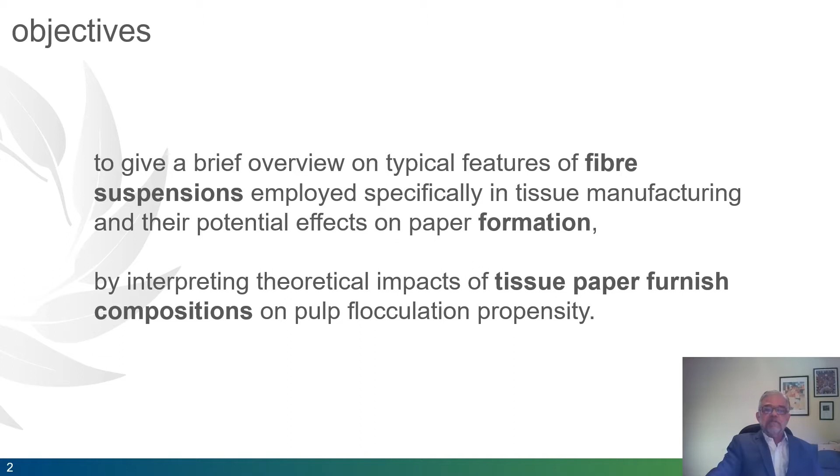Formation is affected by many factors, but fiber suspension mechanical flocculation is critically harmful. So, to study the impact of fiber suspension characteristics on formation, this work had the objectives shown in this slide, that is, to give a brief overview on typical features of fiber suspensions employed specifically in tissue manufacturing and their potential effects on paper formation. This was done by interpreting theoretical impacts of tissue paper furnish compositions on pulp flocculation propensity.

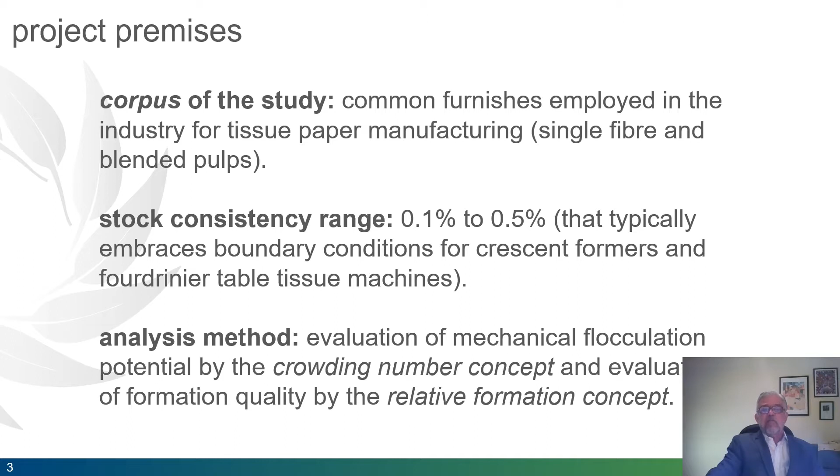This slide shows the premises defined for the work. The corpus of the study was the common furnishes employed in the industry for tissue paper manufacturing. The stock consistency range was defined to be from 0.1% to 0.5%, because it typically embraces boundary conditions for crescent formers and Fourdrinier table tissue machines. The analysis method was defined to be evaluation of mechanical flocculation potential by the crowding number concept and evaluation of formation quality by the relative formation concept.

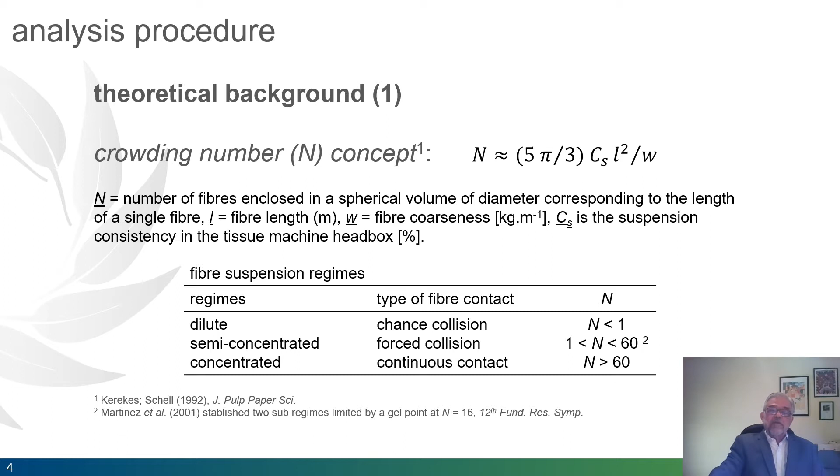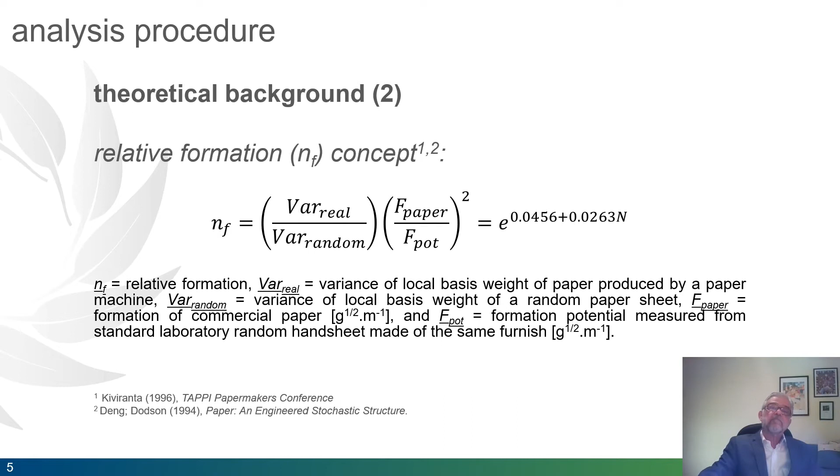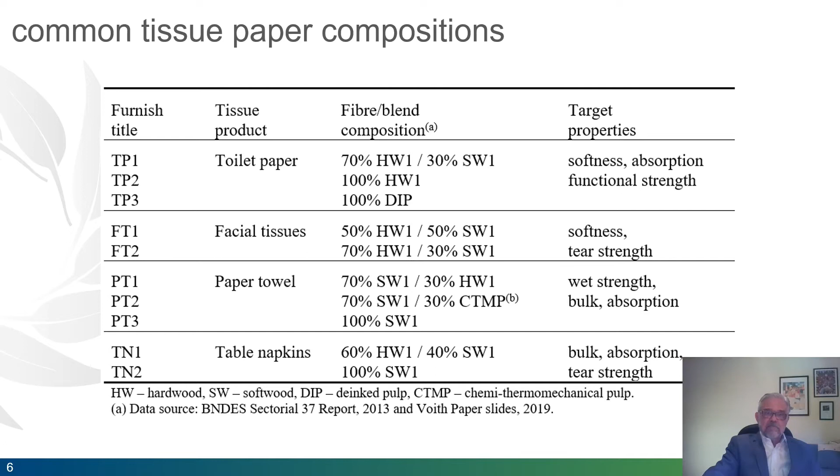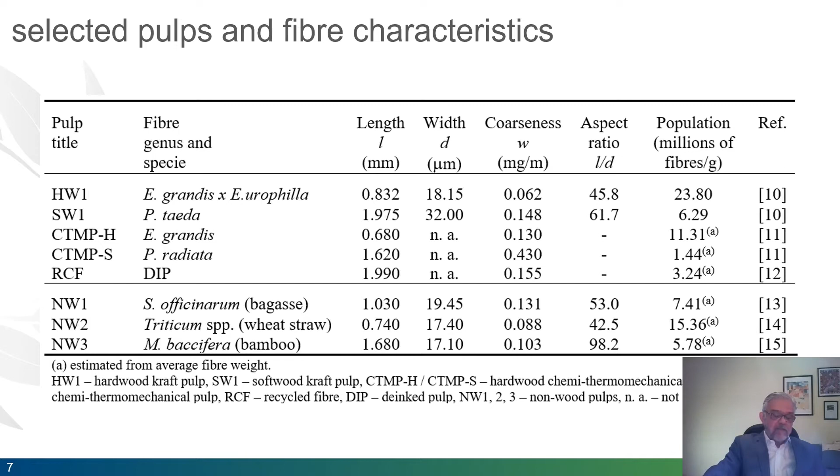Here we can see different hardwood and softwood fiber characteristics, mainly from eucalyptus and pinus species. The table also shows features of recycled fiber represented by the deinked pulp and non-wood raw materials like bagasse, wheat straw, and bamboo. The fiber morphological properties of all pulps in the table were used to characterize the different tissue furnishes in terms of crowding number and relative formation indexes.

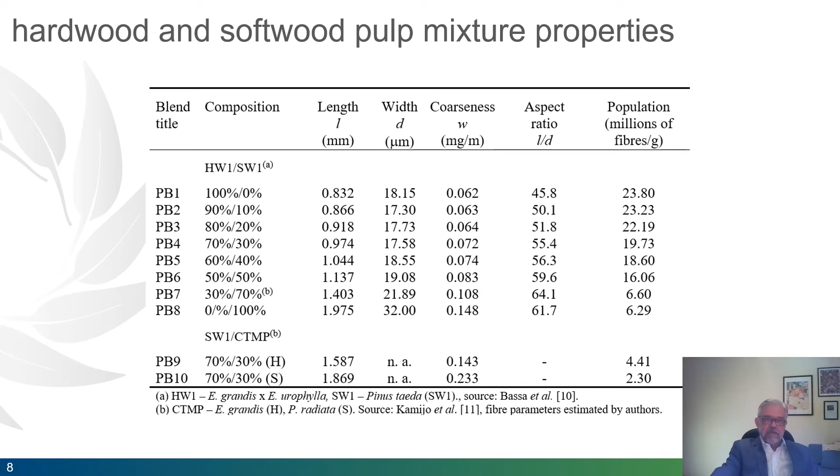This slide shows fiber properties of blended hardwood and softwood pulps used in the present study. In the table, we can see how fiber length and coarseness vary as a function of the increase of the mass fraction of softwood in the mix with hardwood. Now let's see the results of crowding number and relative formation evaluations of traditional tissue paper furnish compositions. Let's start with the flocculation propensity of wood pulps.

In particular cases, crowding number values above 60 that fit the concentrated fiber suspension regime were found. For instance, for the pulp with 100% pinus softwood at high consistency, meaning that fibers are in continuous contact and flocculation is expected.

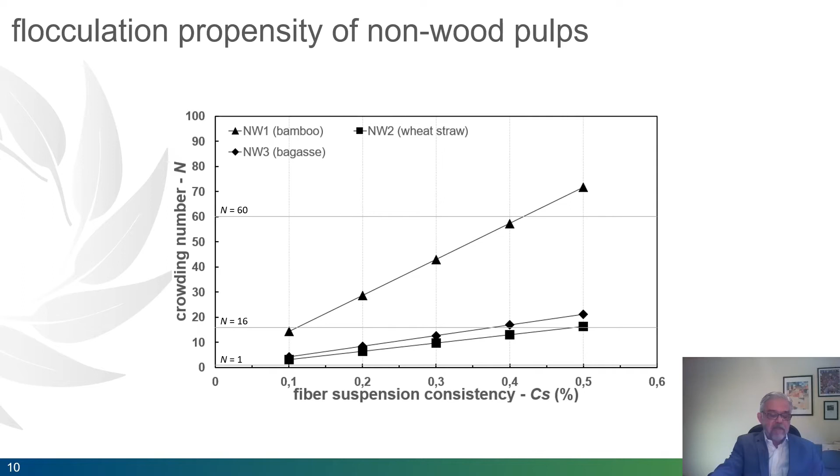Now we see the flocculation propensity for non-wood pulps, which shows a performance equivalence between the bamboo pulp and the softwood pulp. The results for pulp made from wheat straw and bagasse are closer to hardwood pulps, meaning that these non-wood pulps are less sensitive to flocculation. This can be explained by similarity between trends in fiber length and length to coarseness ratio.

Here we have the results of flocculation propensity of toilet and facial tissue furnishes. The adverse effect of softwood content on the flocculation tendency is clear. Toilet paper based on 100% hardwood has a crowding number about 15% lower than the blended furnish made of 70% hardwood and 30% softwood. The same effect is observed for facial tissues when the softwood mass fraction in the furnish is increased from 30% to 50%.

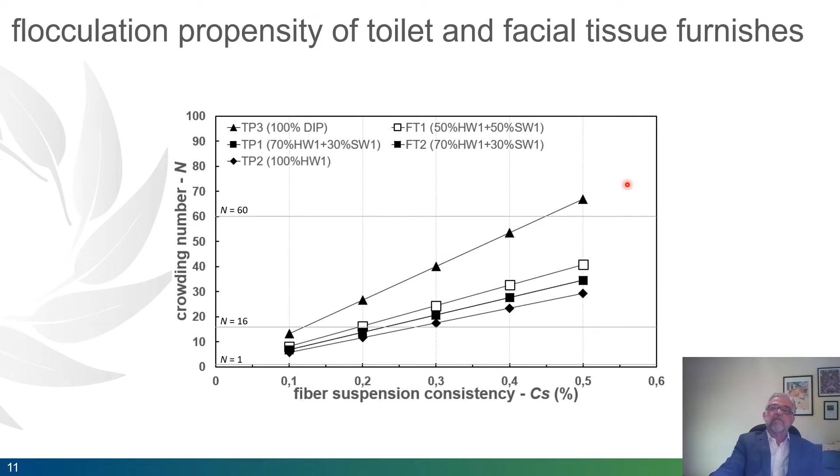A quite high flocculation propensity was found for the furnish based on 100% deinked pulp. The selected deinked pulp contains very long fibers compared to other pulps in the same figure. If we look at the results for paper towel and napkins, we'll see similar results, but now I can emphasize the effect of pulps based 100% on long fibers, that is, on softwood. The higher flocculation potential belongs, as expected, to the towel and napkin furnishes made of 100% softwood, and both have similar behavior to the deinked pulp.

Furnish compositions employing CTMP have lower flocculation tendencies even when mixed with softwood, since CTMP tends to have shorter fibers and higher fiber coarseness. These results emphasize the impact of fiber morphology and stock consistency on flocculation potential of tissue paper furnish, which directly influences web formation uniformity, as will be discussed in the next slide.

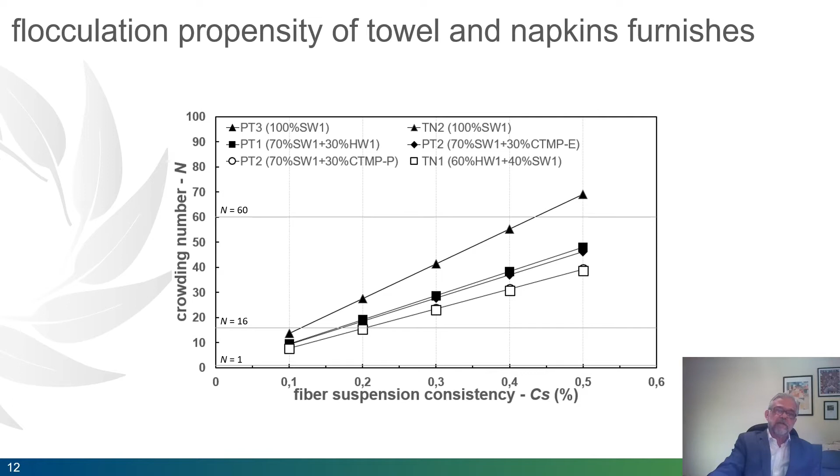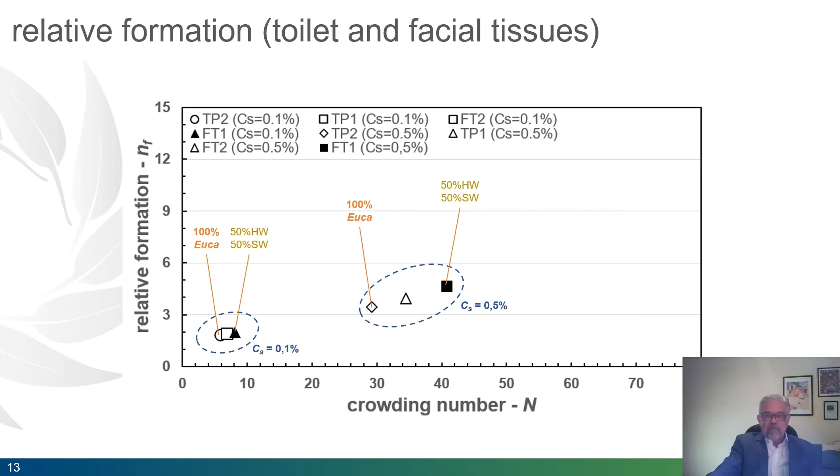The next two slides display the results of relative formation computed for traditional tissue paper compositions, also for the range of stock consistency from 0.1% to 0.5%. As mentioned before, lower NF denotes better formation uniformity or lower grammage distribution variance. Looking at the results for toilet paper and facial tissue furnishes, we see that the lowest relative formation was found for the 100% hardwood or eucalyptus furnish, like in toilet paper. The combination of length and coarseness of eucalyptus fiber is what produces the lowest crowding number. In opposition, the highest crowding number and the highest relative formation index was found for the mixture of 50% hardwood and 50% softwood normally encountered in facial tissue production.

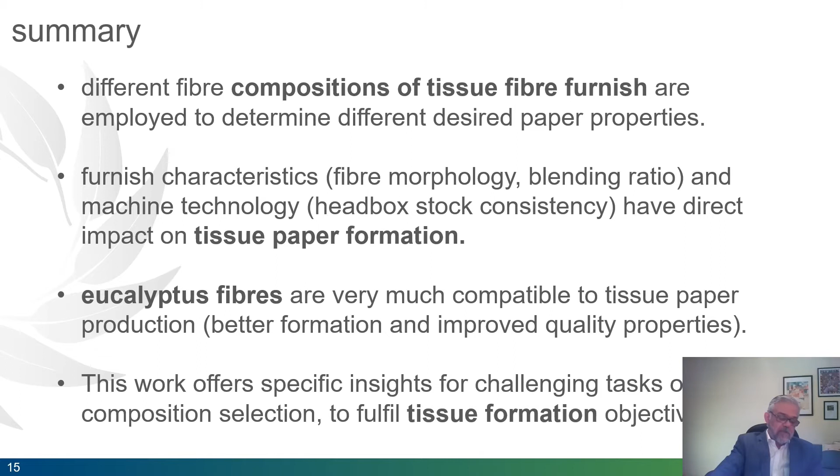In summary, we saw different furnishes employed for tissue manufacturing and how they impact paper formation. I want to highlight that eucalyptus fibers are very compatible with tissue production due to better formation and improved quality properties, and that this work offers specific insights for the challenging task of furnish composition selection to fulfill tissue formation objectives. Thanks for your attention.

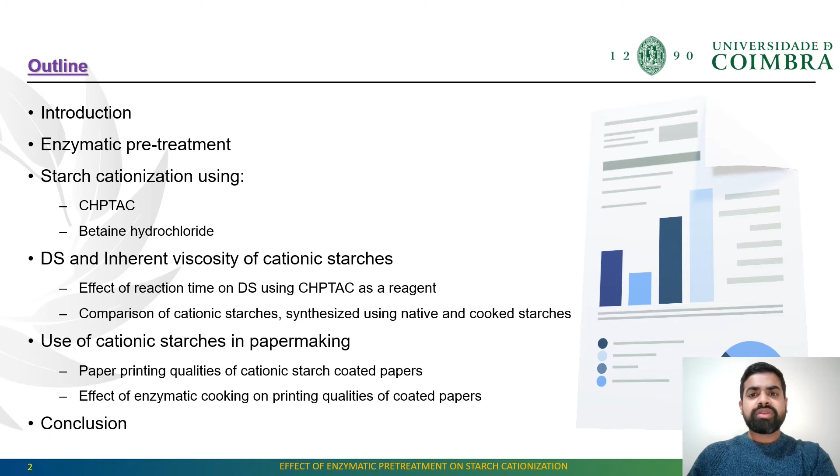Native starch is one of the most common paper additives and is used as a strengthening agent, surface sizing agent and binder in paper coating. These native starches are non-ionic, and due to this fact their applications in papermaking are limited. Chemical modification is one of the best ways to expand their use in different applications. Cationization is a widely accepted method for modification of the physicochemical properties of native starch. Cationic starch is used in the paper industry as a flocculating agent, retention aid and paper strengthening agent. However, modified starch has also been found suitable in surface treatment of paper for improving optical and printing properties.

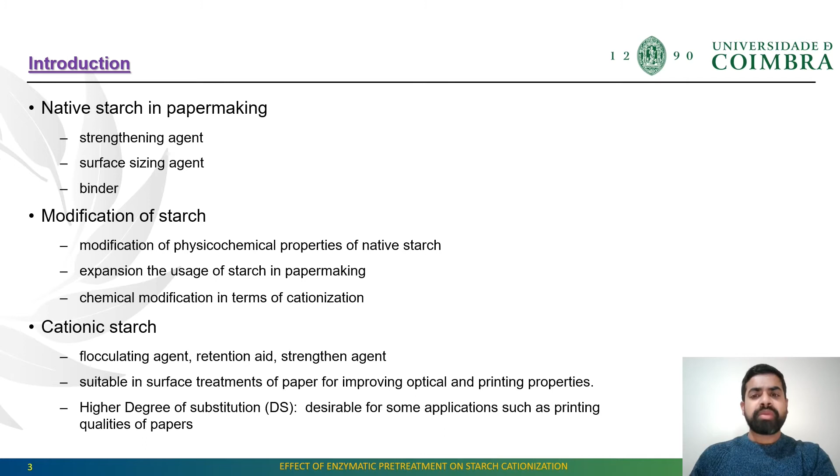Cationic starch can be synthesized by substituting the hydroxy groups of the anhydroglucose unit of starch with positively charged functional groups. The higher the charge, the higher the degree of substitution, which is also desirable in some paper applications such as paper printability. Further, in enzymatic pretreatment, corn native starch was pretreated using alpha amylase enzyme and heated for 5 minutes at 80 degrees centigrade. Then the temperature was raised to 90 degrees centigrade for 15 minutes for cooking the starch.

After cooking, the starch solution was cooled down and absolute ethanol was added to precipitate the cooked starch, which was vacuum filtered, dried and stored in the oven at 50 degrees centigrade. In the enzymatic cooking, the alpha amylase enzyme cleaves the 1,4-alpha-D-glucopyranosyl linkage of amylose and amylopectin, which reduces the degree of polymerization of starch polymer.

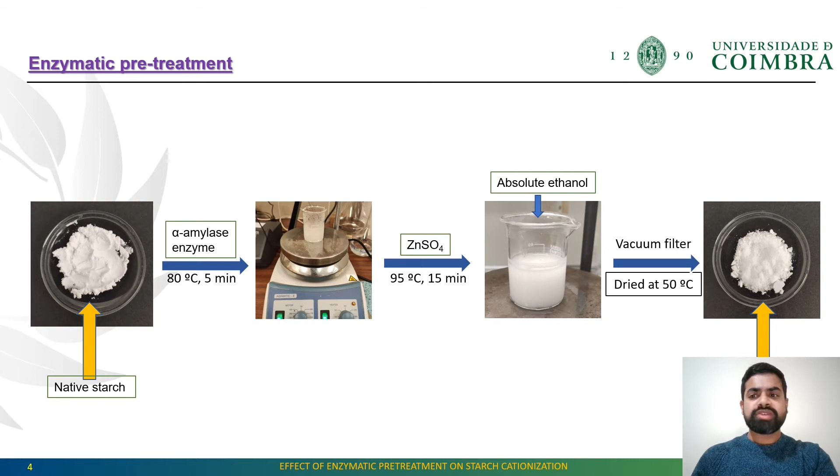Further, with the high temperature cooking, the starch granule structure becomes more open and dispersed. These cooked starches along with the native starch were used in the cationization reaction. For starch cationization, we used three different methods. This scheme shows the first method in which CHPTAC was used as a reagent. In presence of sodium hydroxide, CHPTAC converts to its epoxy form, which further reacts with the starch molecule in aqueous medium. The end product cationic starch ether contains an ether bond between the starch molecule and trimethyl ammonium group.

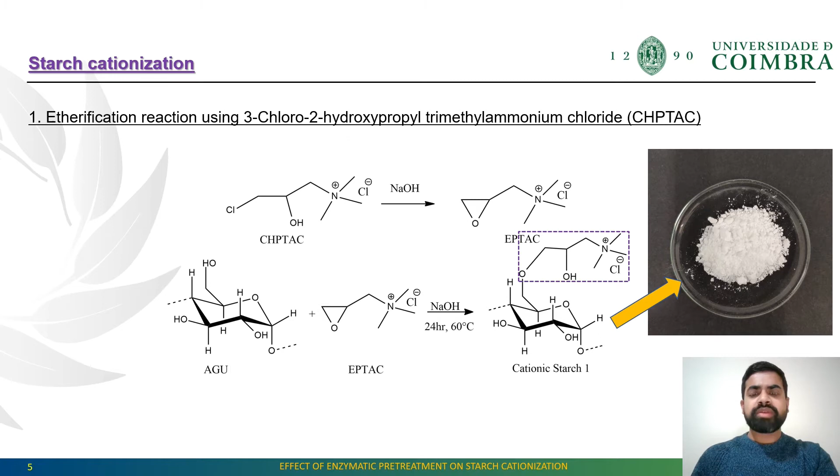We performed the reaction for 3 hours, 6 hours and finally for 24 hours for studying the effect of reaction time on degree of substitution. We obtained cationic starch ether as a white product after precipitating it using ethanol. Further talking about the second method in which betaine hydrochloride was used as a reagent, the reaction proceeded in presence of DIC and DMAP in organic solvents such as DMF and DMSO. It was observed that the final product was a bit yellowish in color and contained an ester bond between the anhydrous glucose unit

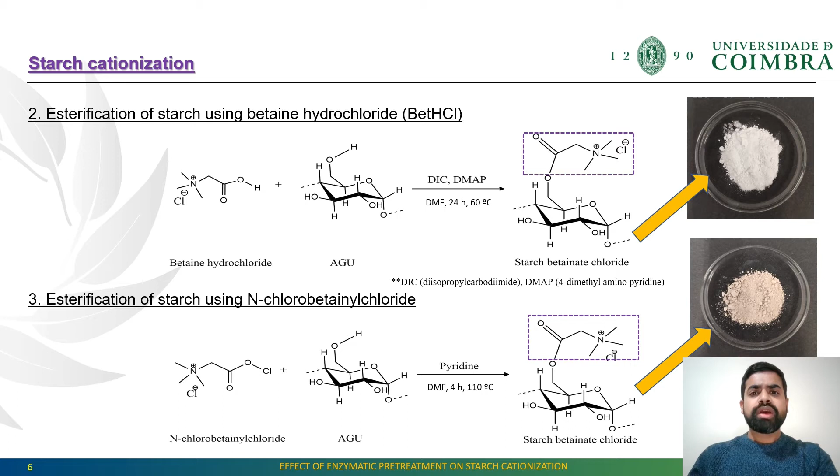and trimethyl ammonium group. The third reaction was also performed using betaine hydrochloride, but prior to the reaction with the starch, it was converted to its acyl chloride using thionyl chloride. The reaction proceeded in pyridine and the final product was brownish in color. As reported in the table, a total of 8 runs were performed covering all these three methods, where the first 6 runs are with CHPTAC reagent. Runs 7 and 8 represent the second and third method using betaine hydrochloride.

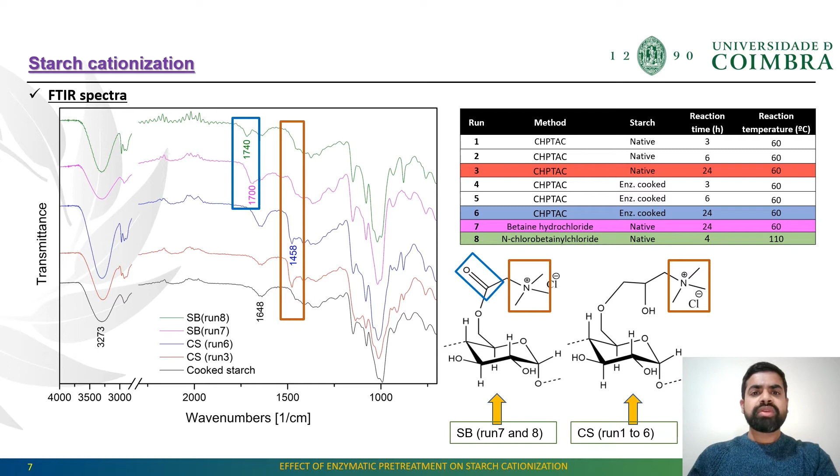FTIR was performed to analyze the functional groups of cationic starch synthesized using etherification in runs 3 and 6 and esterification in runs 7 and 8, compared with the native starch spectrum. All fundamental peaks of starch can be seen in all spectra. Compared to the native starch spectrum, a new prominent peak at 1458 cm inverse can be observed due to the quaternary ammonium group attached to the anhydrous glucose unit during the etherification and esterification reaction. Additionally, peaks at 1700 and 1740 were observed due to the presence of the ester bond in starch betainate.

In this slide, the proton NMR spectra are shown for cationic starch ether and starch betainate and compared with the native starch spectrum. In addition to calculating the DS, proton NMR spectra can also be used for investigating the detailed structure of modified starch. The peaks at 3.5 to 4 represent the hydrogens attached to the different carbons of the anhydrous glucose unit. A singlet at 3.2 ppm due to the hydrogens of the methyl groups attached to the quaternary ammonium group in cationic starch confirms the presence of the cationic group attached to the anhydrous glucose unit. The DS was also calculated using these NMR spectra for each reaction.

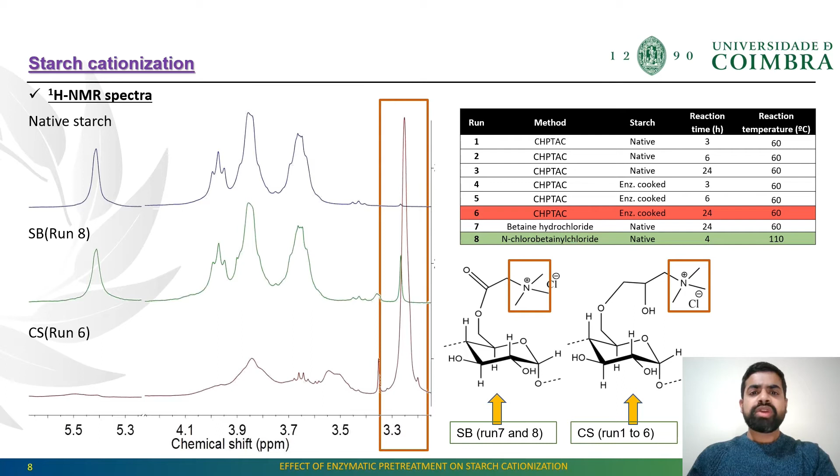Further talking about the DS of cationic starches, this figure shows the effect of enzymatic cooking and reaction time on DS of cationic starch ether. It was observed that with the increase of reaction time from 3 to 24 hours, the DS increases from 0.2 to 0.33 using native starch as a raw material and 0.34 to 0.43 when cooked starch was used in the reaction. This increase is likely due to the formation of more porous starch granules, which facilitates the access of reagent to the hydroxyl groups of starch. It was also observed that the cooking of starch enables the homogeneous dispersion of starch granules in the solvent by increasing the solubility.

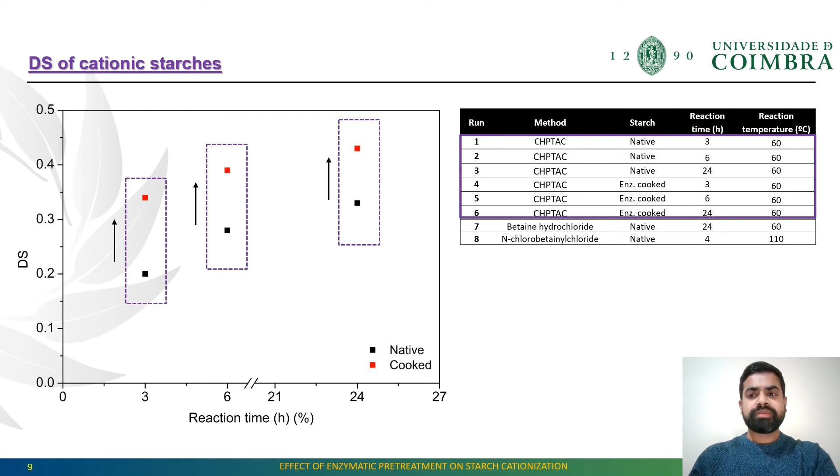Further talking about the inherent viscosity of native and cooked starches, undoubtedly the inherent viscosity decreases with the enzymatic pretreatment, as cooked starch showed lower inherent viscosity compared to native starch. This decrease can be justified by the cleavage of the 1,4-alpha-D-glucopyranosyl linkage of amylose and amylopectin, which reduces the degree of polymerization. In fact, the hydrolysis of starch granules due to the highly alkaline and high temperature environment may also be one of the reasons for decreasing the degree of polymerization.

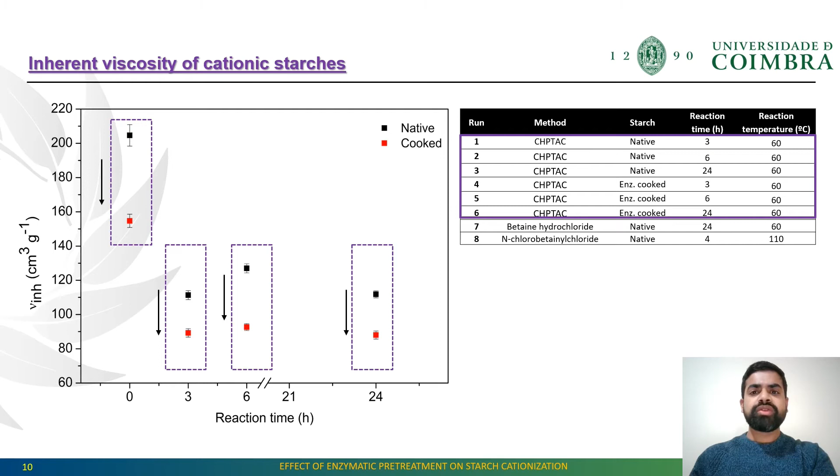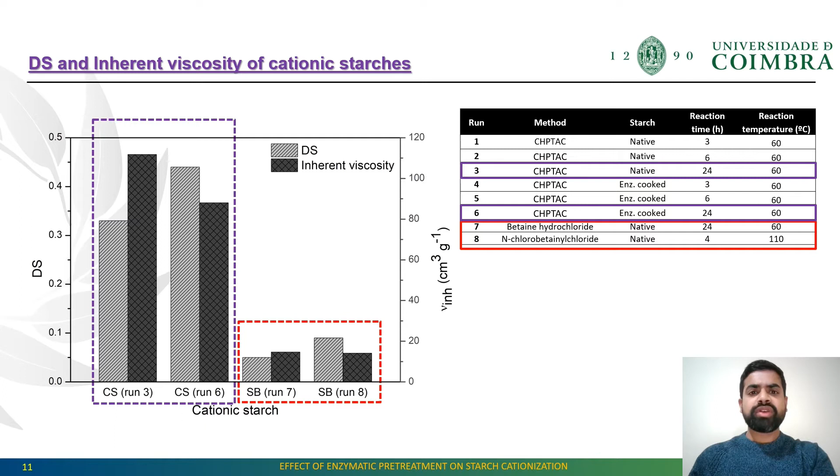The product from the esterification reaction showed a lower range of viscosity. Hence, the same reactions were not performed using cooked starch, as starch granules already face so much hydrolysis during the esterification reaction. Also, lower DS around 0.1 were obtained using run 7 and 8. Besides, a brown color product was also obtained in run 8, which could be due to the more severe degradation of starch granules at high temperature.

Moving forward to the application part, these cationic starches were used to prepare the coating formulation, along with the general coating components such as alkyl ketene dimer and optical brightening agent. The native starch was used as a host component, and calendered base paper without any surface treatment was used for coating operation. The laboratory coater was used for coating operation to achieve 1.5 to 2.5 gram per meter square dry coating weight. Finally, all coated papers were printed using an inkjet printer. Further, the printing qualities were evaluated.

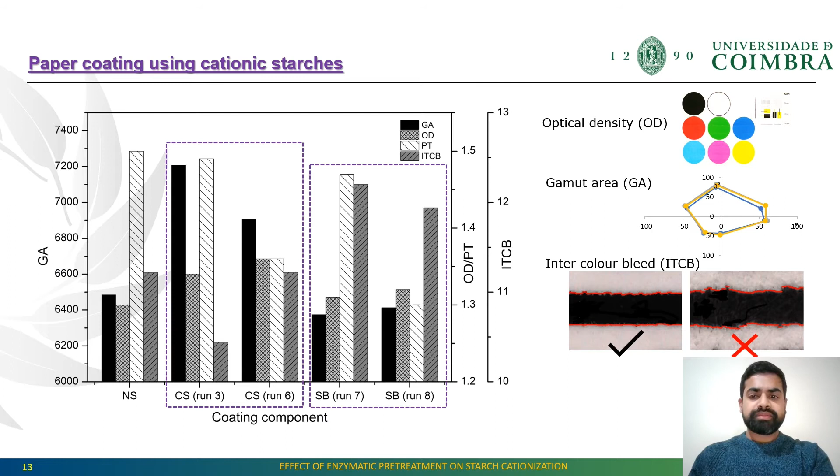Finally, it can be concluded that the pre-treatment of starch using enzymatical cooking and high temperature converts the granules of native starch to a more porous structure, which also accelerates the reaction efficiency of etherification of starch. While the cooked starch is favorable for increasing the degree of substitution of cationic starches, it faces the challenge due to the decreasing of inherent viscosity. In contrary to etherification, starch betainates synthesized using esterification were low in inherent viscosity, and their brown color makes them less compatible to use in applications such as paper coating for improving the printability.

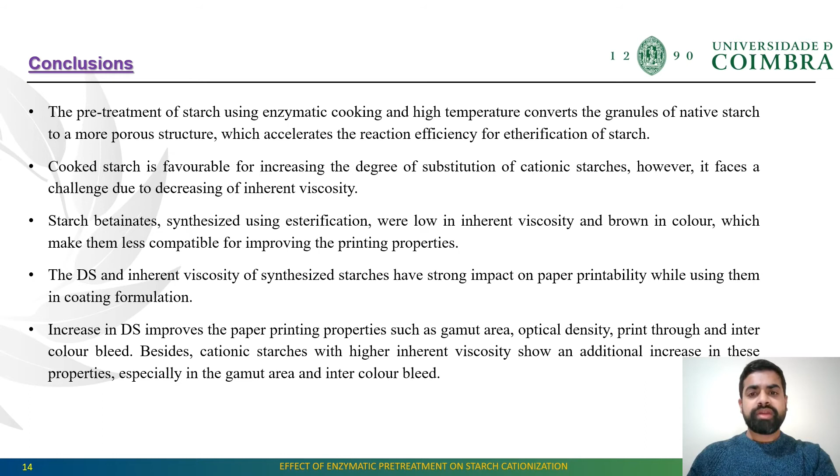The DS and inherent viscosity of synthesized cationic starches have a strong impact on paper printability while using them in coating formulations. It was also found that the increase in DS improves the paper printability such as gamut area, optical density, print through and intercolor bleeding. Also, cationic starches with high inherent viscosity show an additional increase in these properties such as gamut area and intercolor bleeding.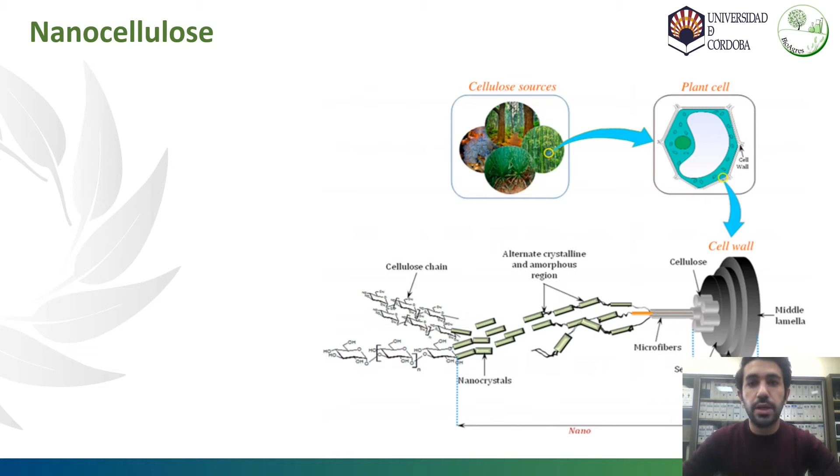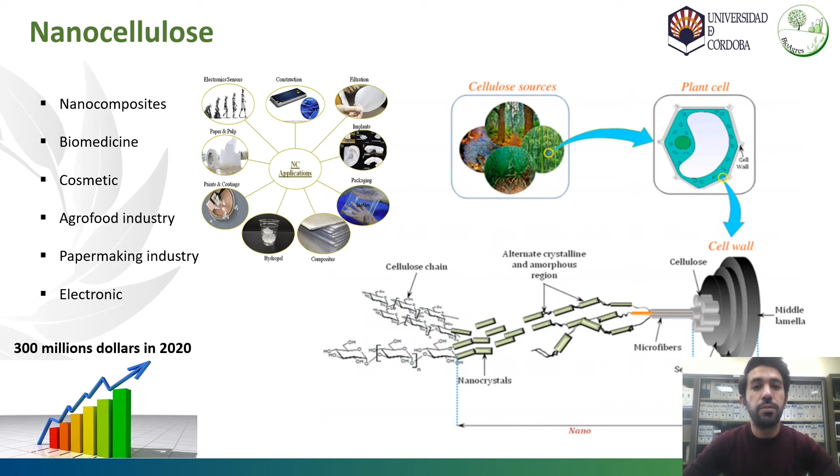Nanocellulose is a cellulosic nanomaterial obtained from the cellulosic fiber of the plant cell wall, and to obtain it, it is necessary to produce the delamination of the cellulosic fiber by means of mechanical treatment. The unique properties of nanocellulose make it a great material to be used in nanocomposites, biomedicine, cosmetics, the agri-food industry, papermaking industry, as in this work, and electronics. This wide applicability allowed nanocellulose to get a market of $300 million last year.

This nanocellulose comprises hundreds of varieties depending on its process, its origin, pretreatment, treatment, and the subsequent modification for the specific application. Therefore, it is necessary to establish a standardization method that allows us to compare the different varieties in an objective and precise way.

Some of the factors that influence these varieties and that we need to evaluate to get information are the chemical composition and morphology of the initial fiber, the size and surface area, for example, the surface charge, the specific surface area, the morphology of the fiber, the interaction with the medium, for example, the rheological properties, their mechanical properties and the reinforcing effect on polymers, and their impact on health and safety.

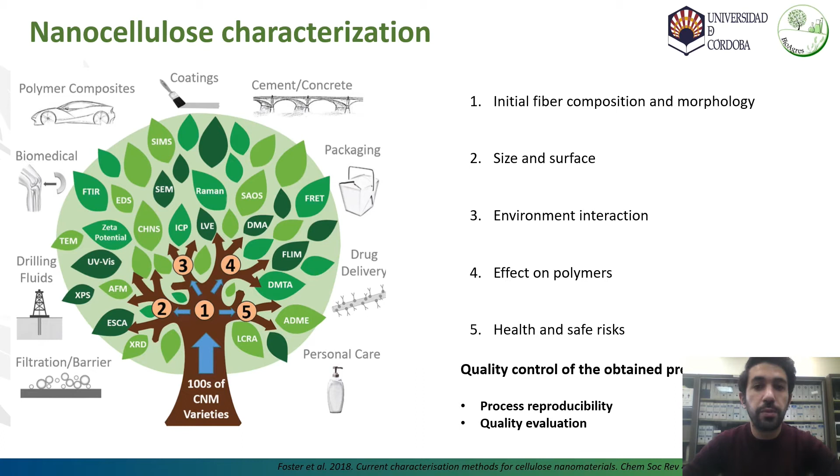We need these methods of analysis that are necessary to ensure adequate quality control of the product obtained and then ensure the reproducibility of these processes. As we have seen, there is a wide variety of possibilities when it comes to producing cellulose nanofibers. For example, for the shown raw material, there are a multitude of combinations of pretreatment and treatment to produce it. At present, there are at least 7 pretreatments and 9 mechanical treatments, which indicates that for the same raw material we can obtain 63 different nanofibers.

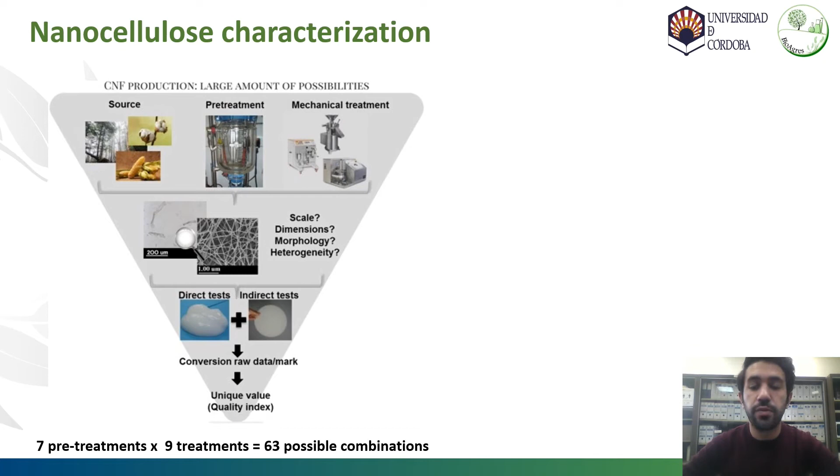So it's very important to follow standardized analysis and create a quality index to distinguish between the different samples and reflect information regarding the nanofibrillation and properties. In this case, first, it is necessary to define the quality requirement that will define the quality index and what analysis will be performed to reflect this quality requirement. Secondly, it is necessary to determine the scope of application for the cellulose nanofibers obtained.

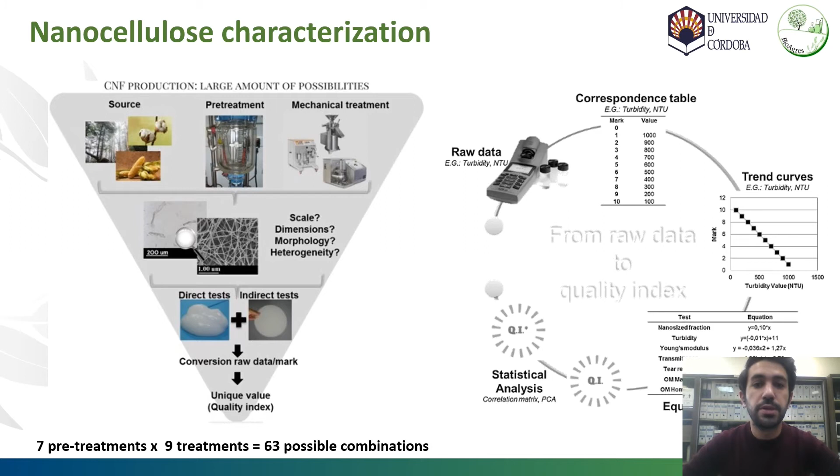In this work, we are going to use the quality index proposed by Desmaisons et al. and will try to explain it briefly. For this analysis, 8 parameters were established in order to represent all the aspects of the nanofibers. Half of the tests were performed on the suspension, which are called direct tests, and the other half were performed after the transformation of the suspension into a nanopaper, which we call indirect tests.

From the observation under the optical microscope, it was possible to characterize the macrometric fraction by analyzing the average particle size and the homogeneity of the sample. Therefore, the higher the nanofibrillation, the smaller the mean particle size, and in most cases, the greater the homogeneity of the suspension. The nanometric fraction was analyzed by 2 direct tests on the suspension by measuring, in one case, the nanofibrillation fraction, a kind of nanofibrillation yield from the centrifugation of the suspension, and by measuring the turbidity. The lower the turbidity, the higher the nanofibrillation in this case.

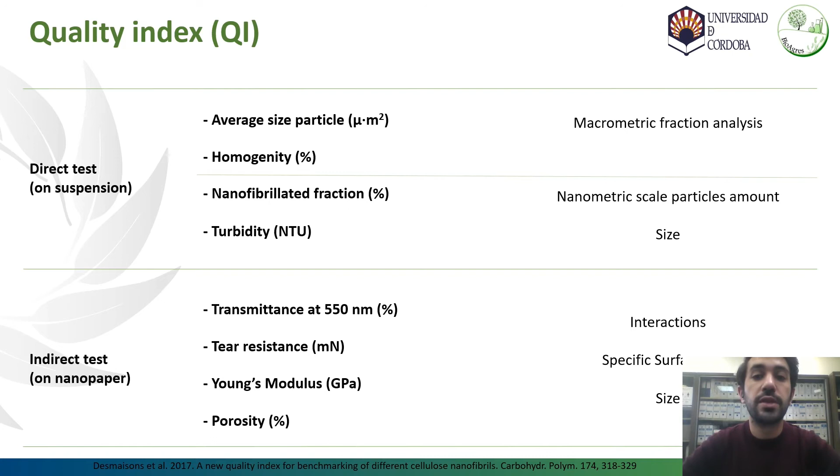The indirect test was performed with information on the interaction of the nanofibrils, their surface area, their morphology, as well as information that is relevant to the direct test. In this index, to determine the transformation of the value of each variable on a scale from 0 to 10, nanocellulose were obtained from different pulps using a so-called ultrafine grinder, collecting samples every 20 minutes to collect different degrees of fibrillation for each sample.

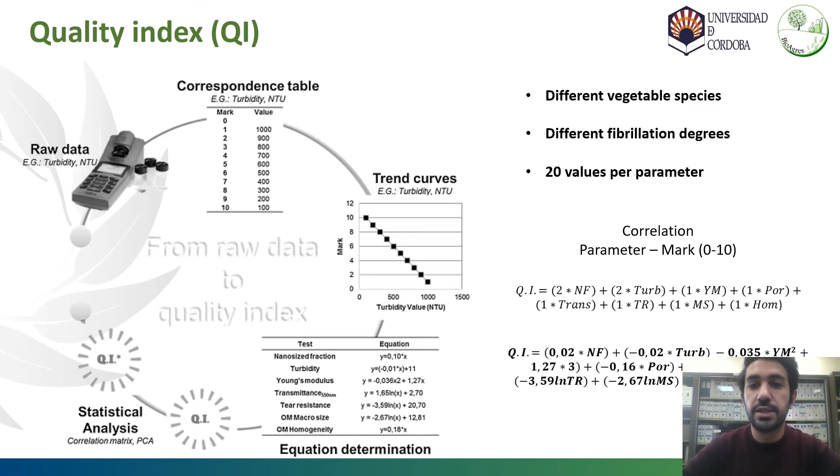A total of 20 values per property were taken to define in a proper way the correlation between the property and the fibrillation. With this correlation, lines for this property were obtained and a value between 0 and 10 was given, which will be used for extrapolation of this value when obtaining the result of this analysis. In order to study the suitability of this index for the analysis of different fibers, several tests were carried out.

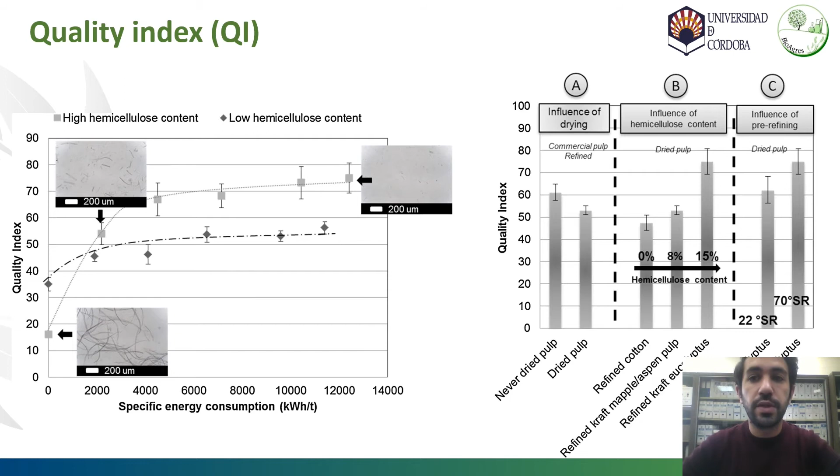In addition, the effect of pre-drying of the pulp and pre-mechanical refining before enzymatic hydrolysis were also studied and analyzed, concluding that these parameters also affect the quality index values. Once the parameters of the quality index were established, different commercial nanocelluloses were studied. Those shown in dark color are treated by enzymatic pretreatment and the light ones by TEMPO oxidation or cationization. And we observed that there are significant differences even when the different nanocelluloses were obtained by a similar treatment, as we saw in the first part of the graph.

In addition, the repeatability of the same process in different periods was also evaluated, obtaining a very similar quality index value between both treatments. We saw the effectiveness of this index for the quality control of the final products. The influence of the surface charge on the index was also studied, the index being highly influenced by the surface charge, since it implies a greater fibrillation in this treatment.

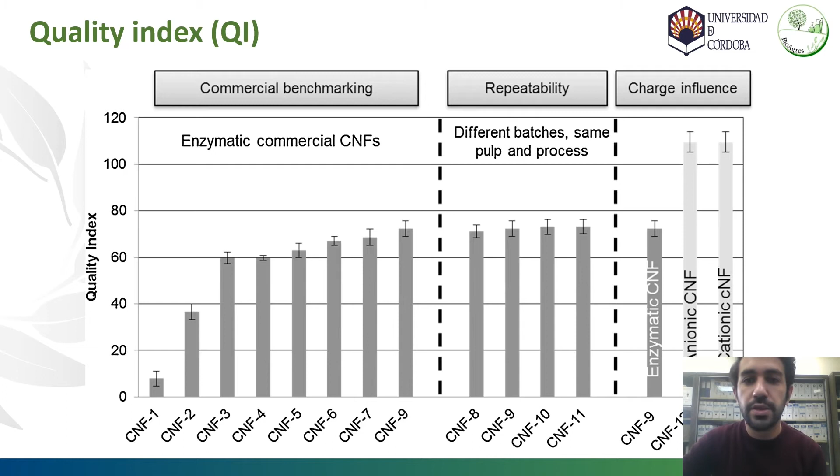In the end, the objective that we search is an easy and fast quality index that allows us to evaluate all the properties of the nanocellulose. Then, it was proposed to limit the number of criteria required for the calculation of this index by means of a correlation matrix between the different parameters, where beyond a correlation value of 0.6, it was considered that both parameters are dependent and that this dependence is high when it exceeds the 0.7 value.

After this analysis, it was concluded that there are 4 parameters that are really independent of each other, thus setting the parameters to be analyzed for the calculation of this index in the nanosized fraction, the turbidity of the suspension, the Young modulus, and the macrometric size, obtaining a new equation for the calculation of this simplified quality index.

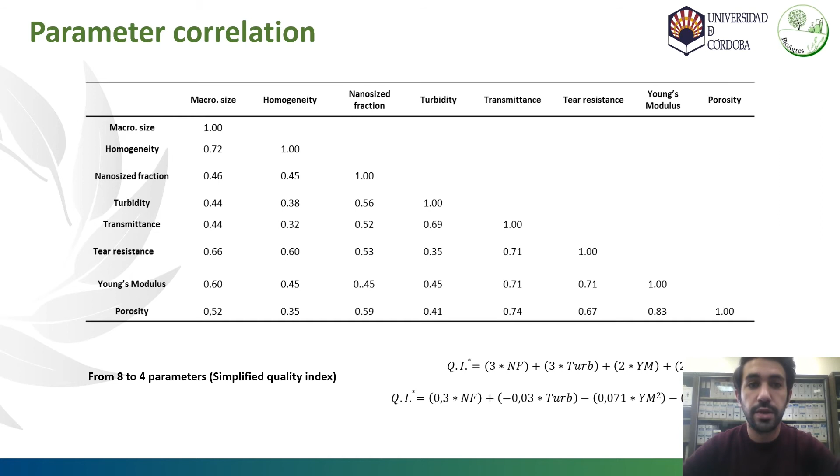To observe the suitability of this simplified quality index, correlations were established between the original index and the simplified one, observing a high correlation between the values shown by both. So it can be concluded that both indexes reflect the characteristics of this nanocellulose in a similar way, and therefore it's simpler and faster to perform the simplified one.

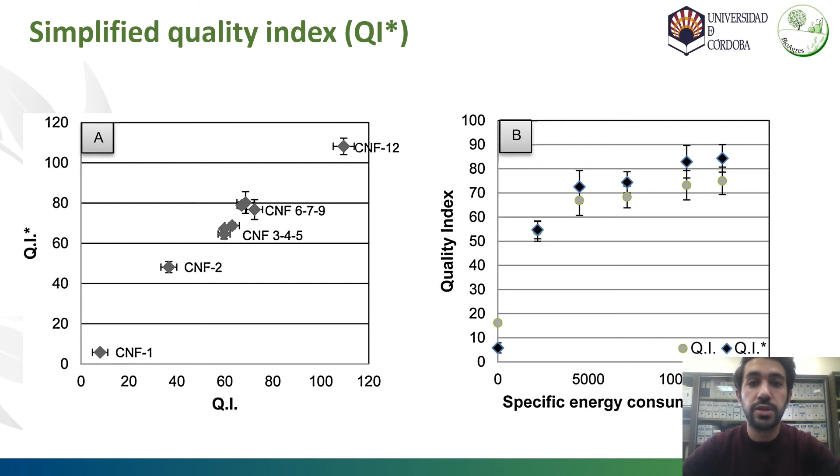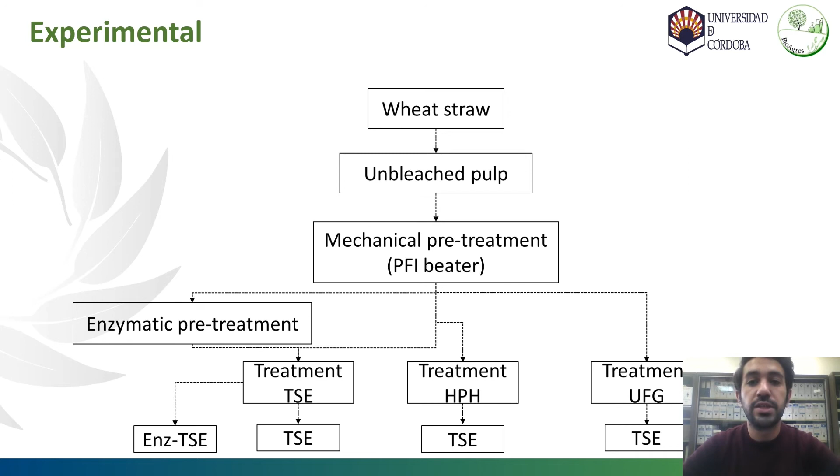The aim of this work is to analyze the influence of nanofibrillation treatment on its quality calculated with this index, and the application of these nanofibers in the papermaking industry, specifically in the cardboard recycling process. For this objective, straw was used as raw material for the production of lignocellulose nanofibers by means of mechanical treatment, which consists of mechanical refining in a PFI refiner and different separate treatments. For example, the twin screw extruder, high pressure homogenization, and Masuko ultrafine grinder, in addition to trying to improve the extrusion treatment by means of enzymatic hydrolysis as pretreatment in combination with the mechanical refining.

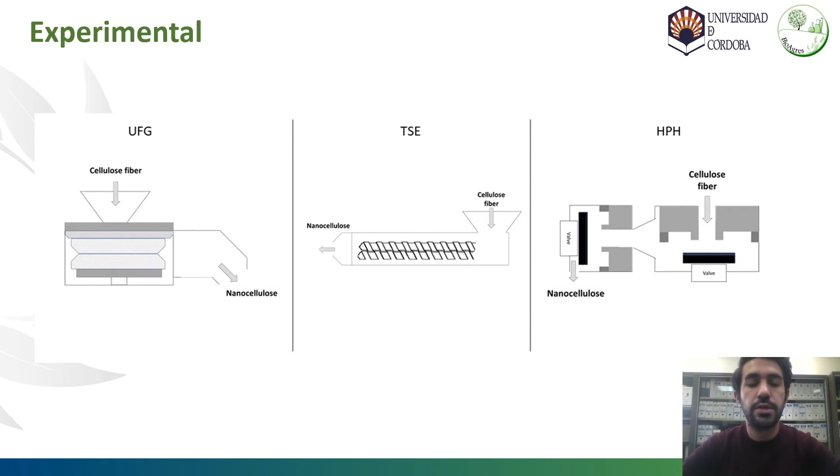This diagram shows the different technologies used in the production of cellulose nanofibers. In first place, the ultrafine grinder, the Masuko, the most innovative one, that is the twin screw extruder, and the classical high pressure homogenization.

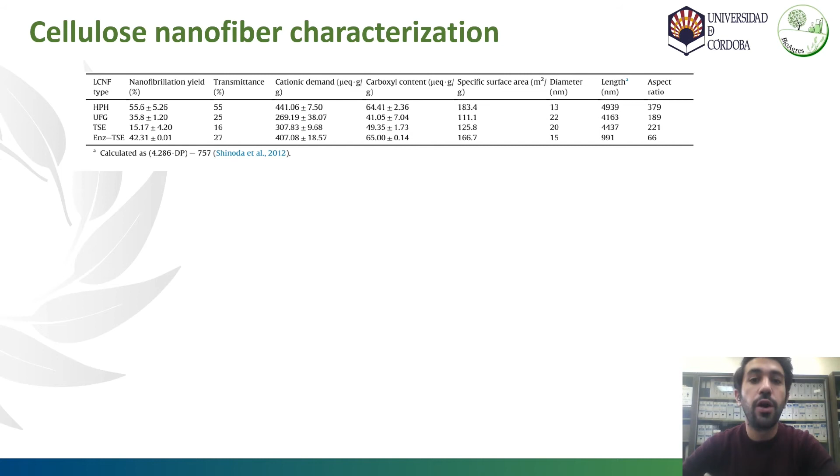Four different types of lignocellulose nanofibers were obtained: homogenization, ultrafine grinder, and extruder, and the one from the extruder but with enzymatic pretreatment. Of these three lignocellulose nanofibers obtained by mechanical treatment, it is known that those obtained by homogenization are the ones that present the best result in yield. However, all of them present very acceptable diameter values that were verified using AFM.

It is observed that all of them present similar length, but if we observe the aspect ratio, that is the length-diameter ratio, we see how those obtained by homogenization present a higher value. This value is closely related to the reinforcing effect that nanocellulose can exert as reinforcement in materials, so it is a parameter of special interest.

If we analyze the difference between the mechanical and enzymatic pretreatment in the extruder, we see how with enzymatic pretreatment we increase the yield, we obtain a smaller diameter, but there is a decrease in the length of the fiber due to the hydrolysis produced by this pretreatment. It also affects the aspect ratio and consequently its reinforcing effect.

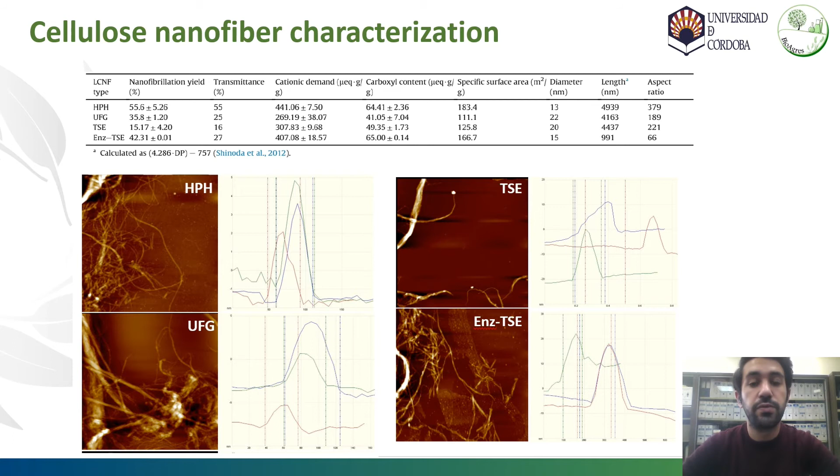The different lignocellulose nanofibers were applied as reinforcement in recycled paperboard and compared with the reinforcing effect produced by mechanical refining as conventional treatment. In general, the mechanical properties increase as the lignocellulose nanofiber content and the intensity of the mechanical refining increase compared to the baseline values of the recycled cardboard.

Setting a target value of 3,443 meters for the reinforcing effect, data that were obtained from the analysis of virgin cardboard at industrial level, we can see that this value is reached for 1.5% of lignocellulose nanofiber and 1,000 revolutions for mechanical refining, with the same effect on the reinforcing effect for the different treatments.

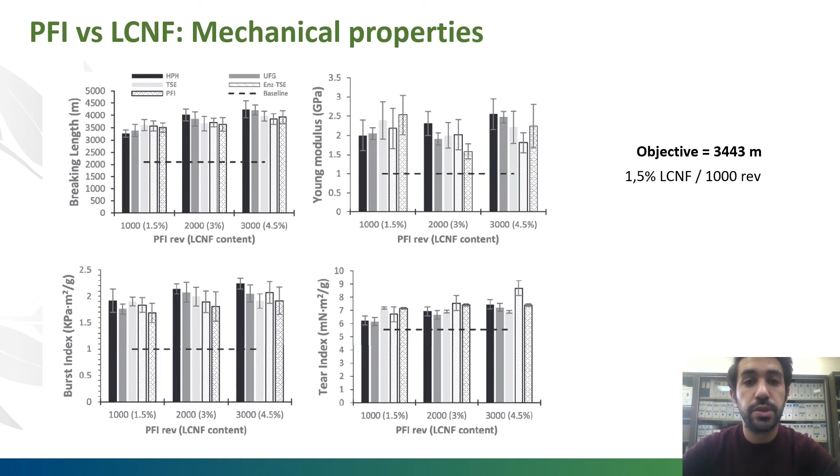If we observe, the values where greater reinforcing occurs coincide with the maximum amount or intensity of refining, producing reinforcement of more than 100% for the rupture length, Young's modulus, and burst index. However, the tearing index was only increased by 30%.

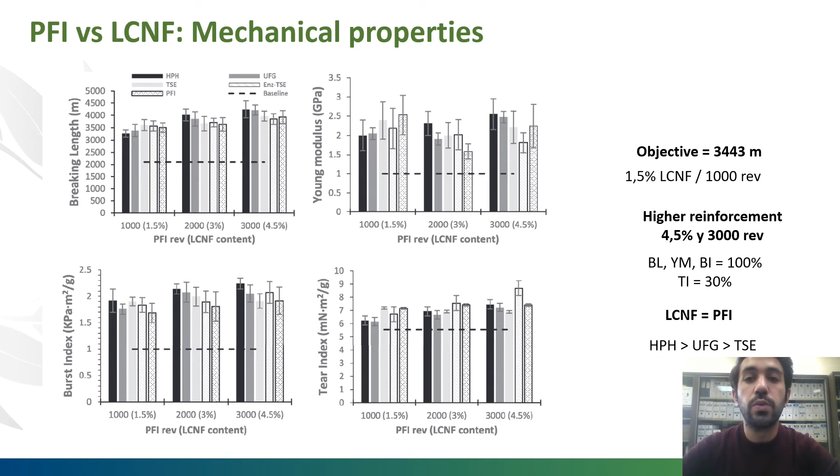We can also observe that reinforcing intensity is similar for both technologies, but when comparing treatments, small differences are observed, the homogenization being the one that gives the best result due to the high aspect ratio that we commented, followed by the ultrafine friction grinder, the Masuko, and finally the extrusion, but all of them very close values. If we look at the effects of the pretreatment in the extruder, we see that there are no significant differences in the reinforcing effect.

The physical properties were also analyzed, and we see how the thickness decreased with the increasing intensity of the mechanical refining and of the nanofiber content, and in addition, density increased, porosity decreased, and Gurley porosity increased. This is due to the fiber bonding produced by both technologies, especially due to the interaction between the cellulose nanofiber and the filling of the voids in the paper matrix by the nanocellulose fibers.

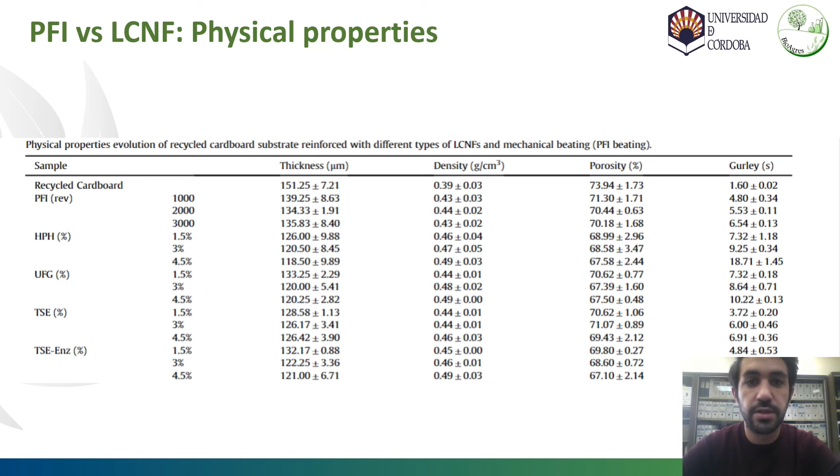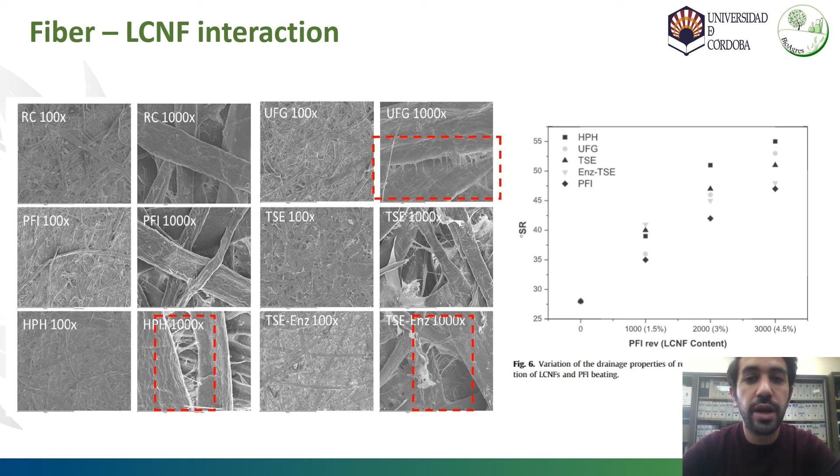In the microscopic image, we can observe the effect that these lignocellulose nanofibers produce between the fibers to exert the reinforcing effect and the interaction that we were talking about. We can also observe that as the nanofiber content or the intensity of the refining increased, the resistance to drainage increased due to the greater interaction with the medium where the nanofibers are added, and the surface area of the fiber increased during the refining.

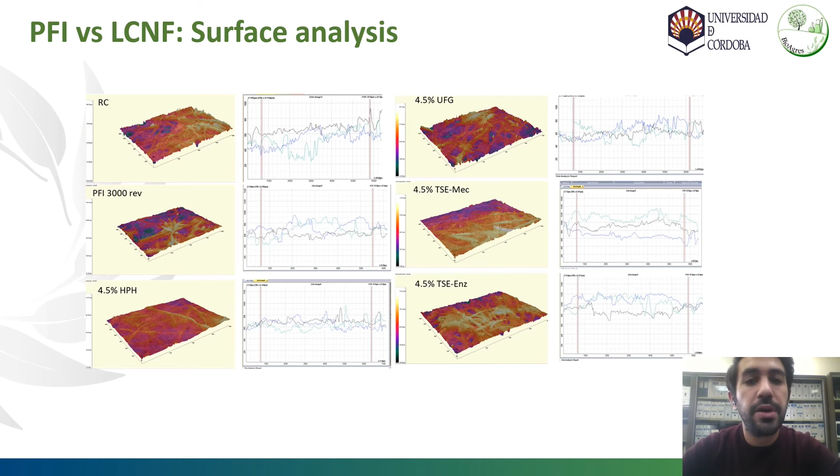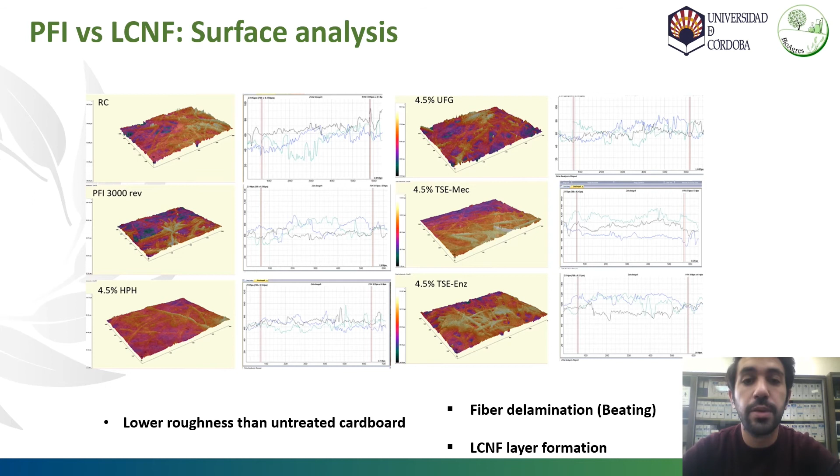It was also studied how the reinforcing effect of the lignocellulose nanofiber and the mechanical refining affect the roughness of the paperboard in comparison with the initial recycled substrate, and it was obtained by laser profilometry that both the addition of lignocellulose nanofiber and mechanical refining present papers with lower roughness than the untreated paperboard, due to, in one case, the delamination of the fibers in the refining, and to the formation of a surface layer of lignocellulose nanofiber that produces this smoothing of the paperboard.

One of the main problems in the production of cellulose nanofiber is the high energy demand that this kind of process requires. We analyzed the energy consumption required to obtain the different types of lignocellulose nanofiber studied in this work, and we observed that the homogenization process requires 32,000 kWh per ton, the ultrafine grinder, the Masuko, 30,000 kWh per ton, and the extruder only 6,000 kWh per ton. In addition, if the fibers are subjected to enzymatic pretreatment before passing through the extruder, the energy consumption is reduced by 37%.

If we assume, as we have seen, that all technologies achieve a similar reinforcing effect and compare the energy required for each reinforcing intensity, we obtain that compared to the mechanical refining, the homogenization and the ultrafine grinder, the Masuko, require 59% and 49% more energy respectively. However, using nanofibers coming from the twin screw extrusion process, it consumes 233% less, and 426% less energy if they are subjected to enzymatic pretreatment.

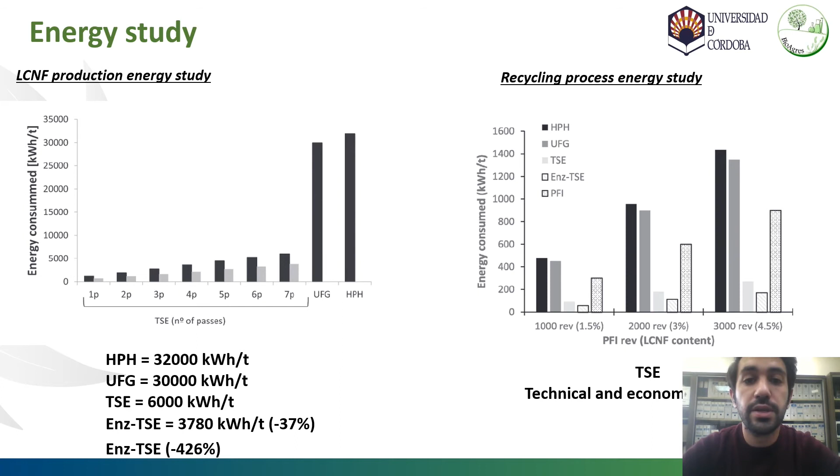So, in conclusion, the use of lignocellulose nanofiber obtained by extrusion is energetically favorable compared to the mechanical refining used conventionally in the industry, which opens a new door to the implementation of this technology in the industry, reducing the energy consumption and increasing the life cycle of the products.